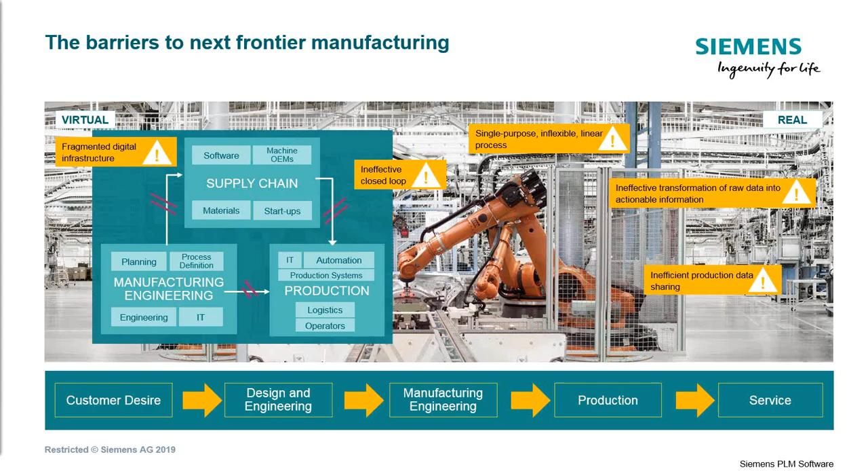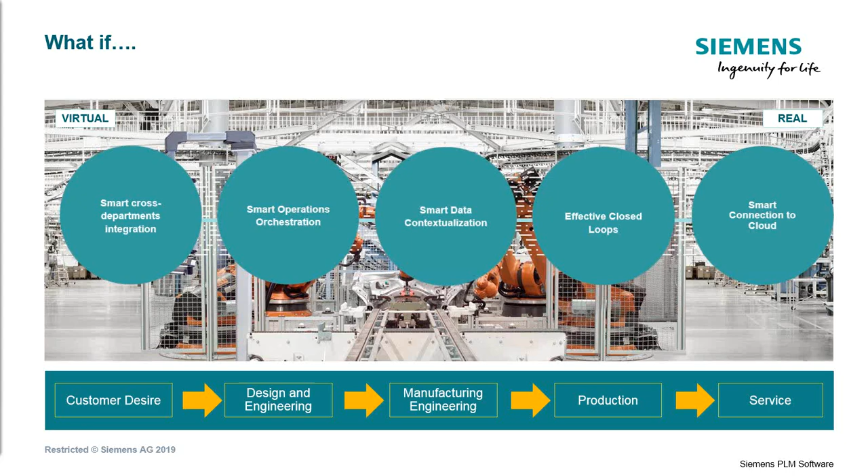So the question is, what if we would really be able to align all that data and the flow, making sure we have a closed loop part of the data that's coming from the ideation of products, so the product design, the planning of manufacturing, through the realization part, which is the manufacturing operation itself, and you can extend it to the aftermarket, also in what we call the utilization part. So what if we get our ducks in a row and get this really aligned in a way that we can have consistency of data and reusability of every event that makes sense to be considered, and transform it into an actionable insight for a stakeholder of the complete product lifecycle. And therefore, we call it closed-loop manufacturing.

If you go to the next slide, please. A concept associated with closed-loop quality, and that is for us closing the loop of data. At a certain point in time you start with the planning part. As soon as you are really designing your product, you start allocating and planning a lot of different activities. This plan goes into a do phase, a check phase, and the act phase, and then again into plan. So for us, it's important to have a closed loop flow of information related to the execution of manufacturing.

So are we really executing in the right way we were planning? Are we really executing with the right performance we are expecting? And then the quality piece, are we really realizing the product at the right quality we were expecting? And is the quality not only related to the product itself, but the processes also at the right stage? If this is not the case, we need, of course, to have a closed loop, a feedback from the reality to the virtual world of the planning part, so the ideation. That's where we can transform manufacturing suddenly into a source of improvement also for the planning departments.

So this is the way we see how we can leverage collaboration within a manufacturing organization by consistent data structure, without duplicating data, by reusing data in a certain structure, and automating responses.

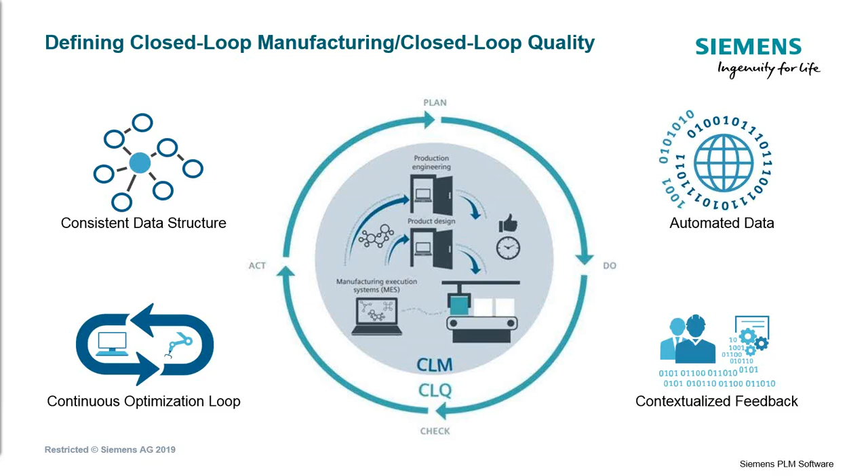This is about really adapting closed-loop manufacturing quality to the different challenges of the clusters of industry, or different types of processes which drive some industries. If we look at complex manufacturing associated with power generation, aerospace and defense, or heavy equipment, we have a low volume, high variant kind of process.

So while building an aircraft, you need to identify any discrepancies or divergences during assembly, and be able to feed it back quickly and in the right context to the planning team, in order to have actionable insight and decisions to make the right changes and feed it back to execution. So it's a constant change management happening during manufacturing of one aircraft.

Differently, if we talk about repetitive manufacturing, where we have the need - if you look at electronics, consumer electronics - to be first to market. So it's most about how can I build an automatic bridge from the PLM to the MES, to the MOM.

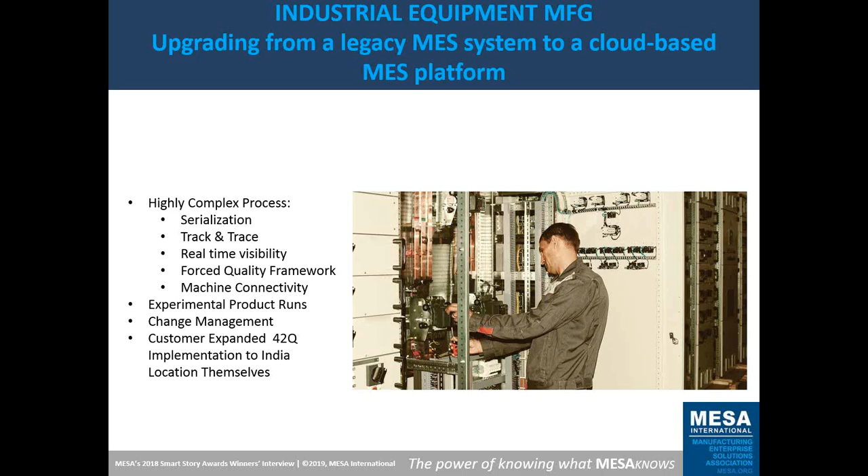When you look at the challenge of the company, it was a high-volume company with complex industrial equipment systems that needed to replace their homegrown MES system for its automated manufacturing line in order to improve and streamline operations. There were a few things they wanted to ensure the new solution would do to meet their needs. One, the system needed to ensure smooth day-to-day operations during the upgrade process, as well as enforce complex routing decisions and real-time decision-making capability.

Again, they would not stop what they were doing. The existing system had to be up and running while we implemented the new one, and the data would have to match. There were challenges on both sides: on their side to run both systems in parallel during the transition, and on our side to make sure everything happened as smoothly as possible from the operator's point of view.

We also needed to connect 100 plus machines, including process equipment, printers, and test stands, covering over 11 different processes for that specific facility.

Traceability of chemical modules produced in one place, which would then be integrated into a system module in a different facility. So it's a multi-plant scenario where, even though the specific pilot was in one location, we're moving the final project to another location, we had to have full traceability of those modules.

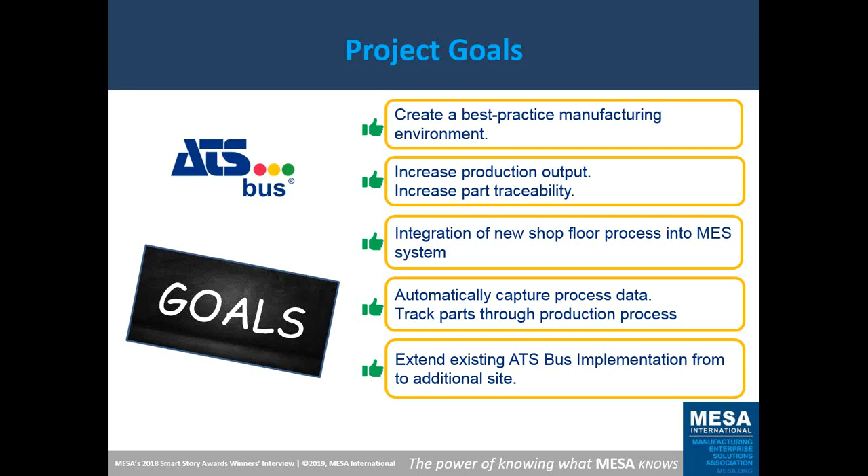Then we want to be able to automatically track that data and push that data through the actual part itself. So the part will track that information through the RFID tags that are used through the process. And then we also had the challenge that we'd already implemented the ATS bus at one of their sites, and we needed to be able to extend that to this new facility. So multifaceted from a point of view of introducing standard processes, new technology, and solving the problem of integrating into a legacy production facility. So if you'd like to go to the next slide.

But we needed to be able to extend that to another site, because the MES system was for the whole of the UK, for all of the manufacturing sites. So as they moved from the legacy system to their iBaseT Solumina MES system, we had to manage that transition, but then we also had to introduce a different type of manufacturing process. So before we'd had a process flow line, this time we're into an assembly line. And that assembly line had been re-engineered, redesigned based on various simulations.

So the input to the assembly line was a kitting process, which had a WIP, work in progress board, so some kind of Kanban system where the kits were being fed into this particular cell. Inside the cell, there's various RFID antennas, actually 3 stations of those RFID scanners. And then we'll track the parts or the kits through the cell to the relevant manual workbenches. Those workbenches were kitted out with smart tools, so Atlas Copco smart tools, hand tools, vernier calipers and things like this, and a WIP tracking display.

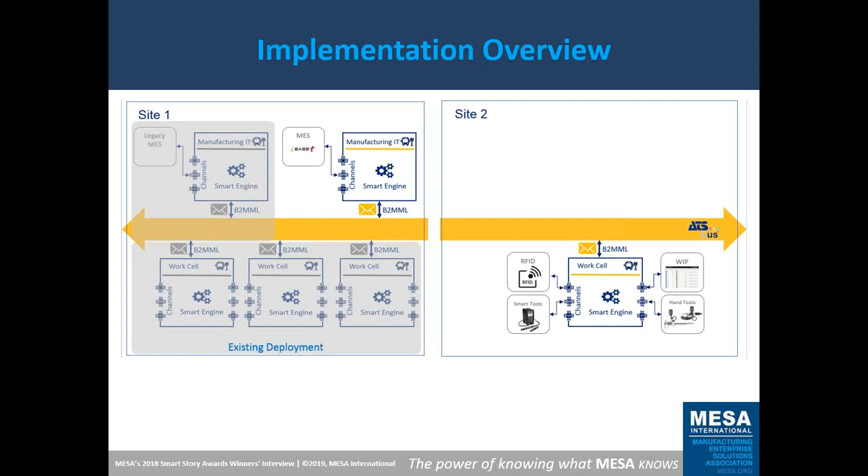So all of that setup was done, and we introduced that line into the production facility. Originally the line was set up within the Catapult Centre in the UK. Then we transferred that to the facility, added it into their existing infrastructure, and changed over from the legacy MES system to the new MES system. And that kind of completed the integration of those types of things.